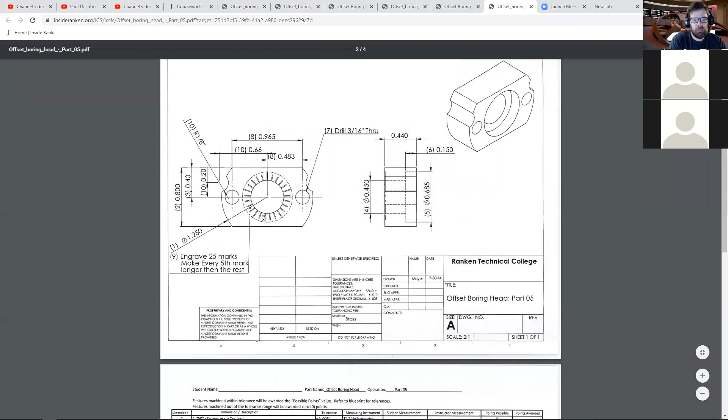So one of the things we can do is just kind of look at it. All right, so we have... I'm going to zoom in here. So if we look at that guy, basically what we have is a square with a radius on the ends. This radius is half an inch and a quarter, so it'd be what, 5/8.

So we have this radius that's 5/8 on each side, and we can also infer that the width of this flat is the same as the center spacing on these holes. Just from looking at that, we see our extension line basically goes up through there. It's not called out anywhere else, so we'll just assume that. Because that's our geometry, we can use that to our advantage.

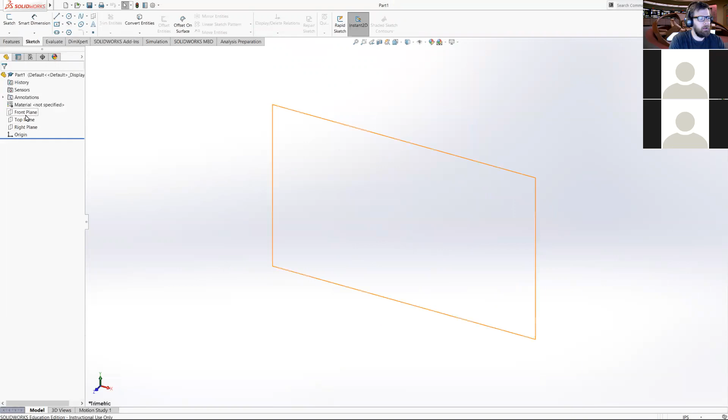Let's see, I'm just going to do top plane. And I'm just going to do a center rectangle here. So our center rectangle is going to anchor this to the center point, which is what we're clicking on, and then we can come out here.

Before doing any of the other geometry, I'm just going to go ahead and start dimensioning this section of it, which will make my life a little easier here in a minute. So that's all we really need to do, just give it our top dimension.

There is one thing there, since that's a two-decimal tolerance, I'm going to change that to 3 because that's how it's called out on our print. Same thing there. That was something you mentioned a couple weeks back, something about how we can set it up to automatically dimension things to 3 decimal places. How do we go about doing that?

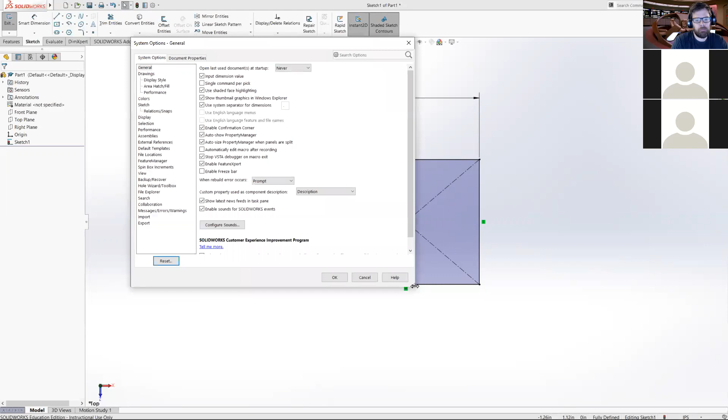Okay, cool. Basically in order to do that, we need to change the settings for this document. If we go up here to the very top in the options drop down, we have 2 different choices on options: document properties and system options. System options are going to be system-wide changes, so if we make a change here, it's going to change every single time we open up SolidWorks on this computer. That change will be enabled.

So the really common ones that I like to change are things like dangling dimensions, or non-imported dimensions. I'll get back into this later because we'll see the difference more when we get into drawings, but this non-imported one I usually change to black. These are system-wide settings, so it's not specific to our document. We can change all those.

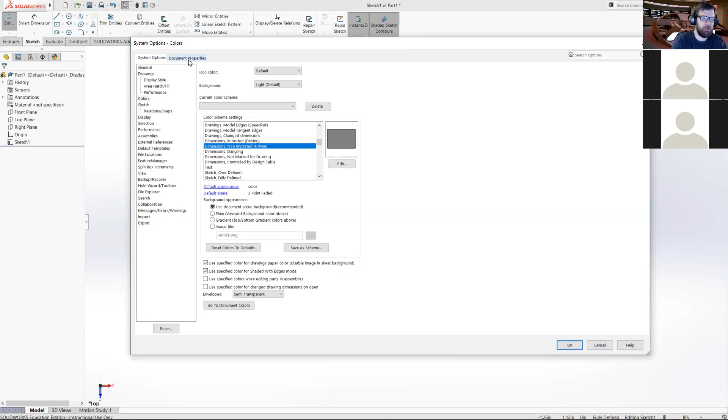But what we're talking about here is changing our unit precision, or our units. So we actually want to get into document properties to change units. If you go to units, we have our unit systems that we can select from. Most of them are going to be in metric, but we want inches, pounds, seconds. Then down here we have basic units, mass section, motion units - basically all of our different units that we're going to be getting information in.

So for length, all you need to do is go down here and change this to 3. Now my drafting standard has been changed. Since we're in here, I like to just change my angles to 0, or to none, because most of the time when you see an angle, it's going to be dimensioned to a full degree. And then we have dual dimension length, so usually it's 2 decimal places.

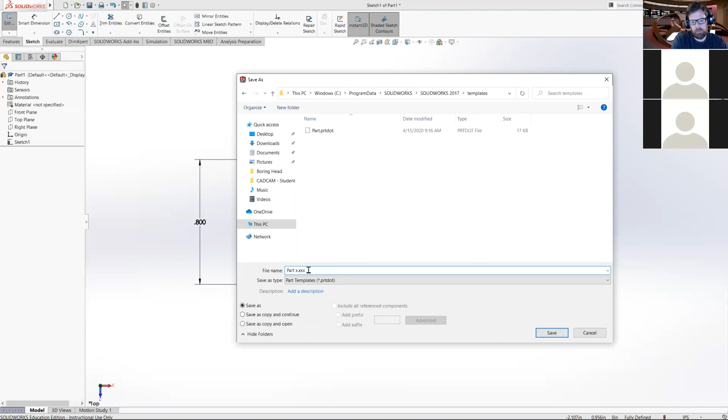Then we click OK, so this has saved that for this one document. But typically when we're doing this, since it's a change we want to make all the time, we can save this as a template right now. So if you save it as a part template, I can say that this is going to be, it's a part file, and it's going to be x.xxx. That's just saying I use the x as a placeholder for numbers, so that's telling me this is going to be a 3 decimal place template.

And now I click save. So right now, if I continue to change this, it's still going to be my template, right? Any changes I make to this are not actually changing my document, it's changing my template. So because of that, I'm actually going to go back and save this as a part file again.

All right, so if I go back, save it as a part, I'm going to find my boring head. There we go. I'm just going to call that offset boring head part 5.

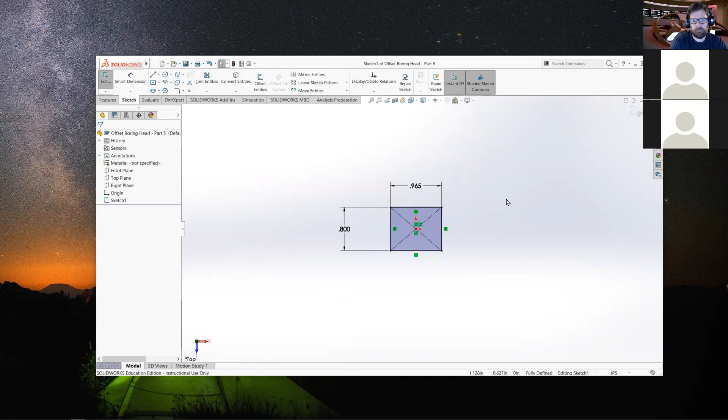So at that point, you just open up the template anytime you want to start a new drawing with those properties? Exactly, yeah. So if I wanted to create a new document with those exact same settings, instead of being in here, this is our basic format. If I have more templates, I can use this advanced tab down here.

At that point, now I see my part x.xxx. The problem with this is when I create a new file, it's going to save this block in there. So you want to change those properties before you start drawing, save it as a template, and then reopen it whenever you need it.

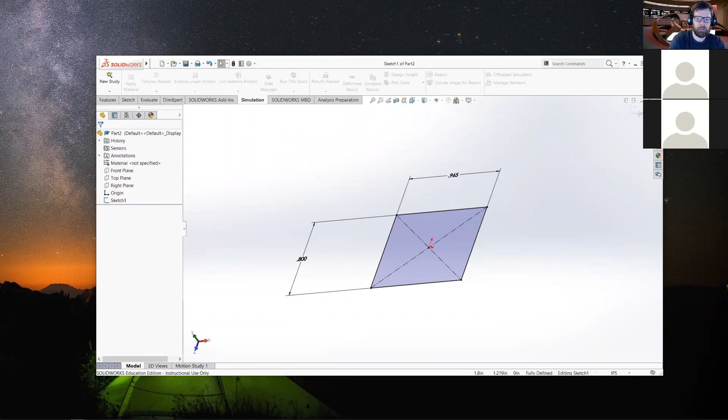Ideally, if you know you're going to be making a template, you'd start it before you start drawing anything in there. Or you can do your template and then just delete it. Like if I wanted to change the template, I could open it, delete the sketch, and then resave that template. I'm not going to, for that purpose. But basically, we'd want a blank file whenever we create a template.

Unless you know exactly what you're looking for. Because in certain circumstances, say you had a part size that, wherever you work, has a lot of different variations. You could set up a template for that part, and then you'd basically just be adjusting that one part to create a new file. So you could do something like that, but most of the time you're going to have a blank file for your templates.

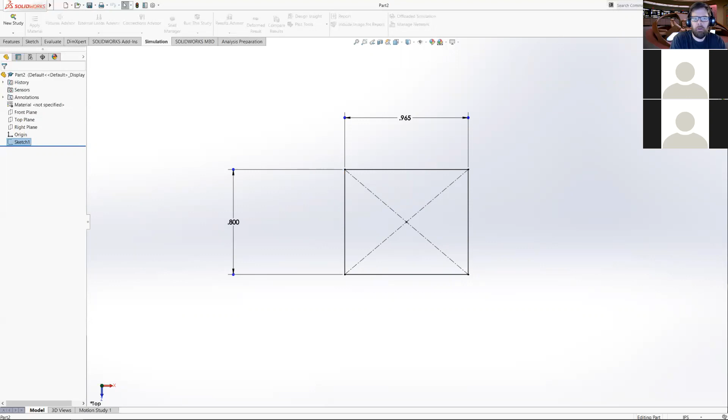All right, so right now I'm still in my part, but I'm out of my sketch. So I'm going to go back and edit sketch. And from here, I'm going to do 3-point arcs.

So a 3-point arc is basically you're selecting the endpoints of the arc first. So all I'm going to do is just click like so. I want to try to have this where it's not snapping to anything. If I come here and it snaps to this, what it's snapping to is a 90-degree arc.

If I look at that, my radius is kind of goofy. It's 566, and my arc angle is 90 degrees. So it's going to want to snap to certain spots. But if you can kind of avoid it so it doesn't snap, that's good, because sometimes it will actually create relations or create something when you let it snap to something.

Yeah, I was dealing with that all day yesterday. Yeah, sometimes it'll snap to a different piece of geometry, and it's almost like it locks it in, but it won't actually have a displayed relation there. It's kind of a weird gray area in SolidWorks.

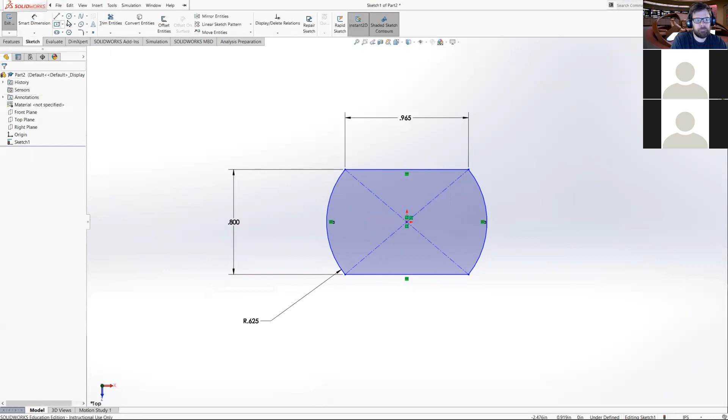All right, so now all I'm going to do is create 2 circles out here, and I'm going to put in a center line here. I could leave it and just dimension both of these, or do a mirror. Either one would work, but we'll do this a little differently.

All right, so that's our center line. It's coincident there, and I'm just going to fix it. Fixing it will freeze this in position, so when I make a relation between any geometry and the center line, instead of possibly moving my center line and leaving my geometry where it is, or moving both of them, that happens too. Now, because this is fixed, nothing can move it.

So with this, I'm just going to select my center line, select both of these circles, and do a symmetric relationship.

So I click symmetric, and that's it. So now when I dimension this guy, this is going to be 660 from the center. It's going to move both of my circles, and then that's going to be 200 from the top. And then I need to dimension this guy.

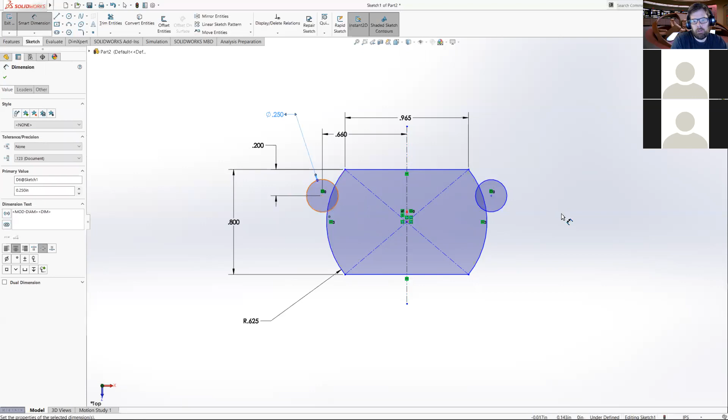So I'm going to dimension that, and that is going to be a 1/4 inch diameter. But if you noticed, it mirrored these geometry-wise, but it did not mirror the size of this, right? So on one side we're 250, on the other side is 247. So in order to make those the same, I'm just going to hold down the control button and click on my second part, and just make these equal.

All right, so I have one dimensioned, so that means that this is fully defined as well. That's really all we need there. So from here, now we can go through and trim. I'm just going to trim that, and I'm going to do the same thing over there. Love that power trim tool. So we're still good there.

So now I'm just going to go ahead and put my center hole in. And oh, I always forget to tell you guys this at the beginning. I usually kind of wait.

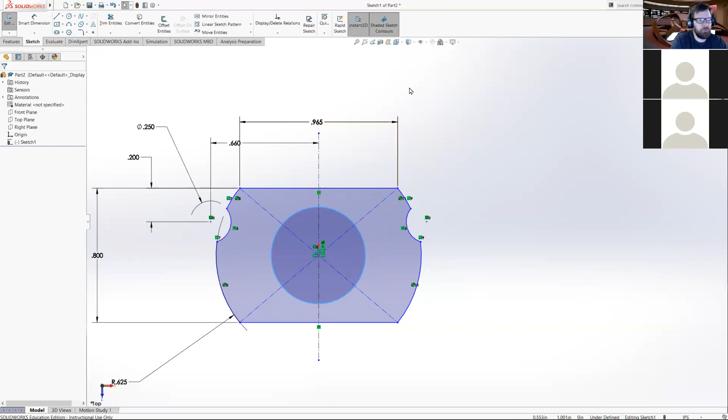One of my favorite shortcuts in SolidWorks is the S key. Wherever your pointer is, if you hit the S key - and it's easy to remember, SolidWorks starts with an S - it brings up the same menu as when you right click, basically what pops up is the draw or sketch menu. In this little menu, I have my smart dimensions, my line tools, my polygon tools, my chamfer, trim entities, offset. I basically have almost all of these, all the same tools that I have up here. So this can really save you some time, because instead of having to go up here every time and then back down, you can just hit your S key and it works pretty well.

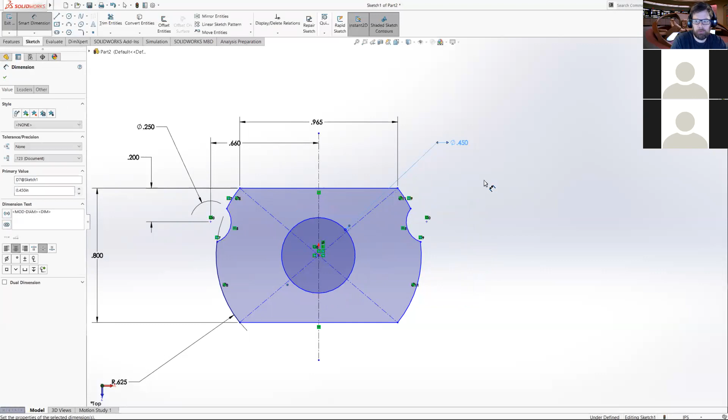So I'm just going to dimension that guy. It's going to be 450 all the way through. And then I'm going to extrude, so it's going to be 440. Just hit enter a couple times, and now we got it. All right, and so my sketch lines are still showing because I basically have my boss selected. Once I click on that, it'll disappear.

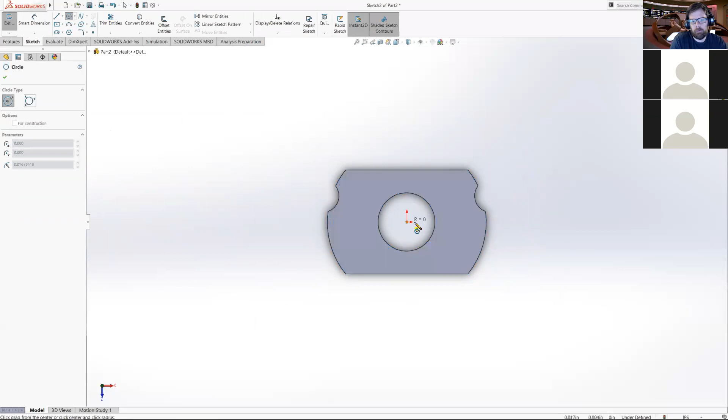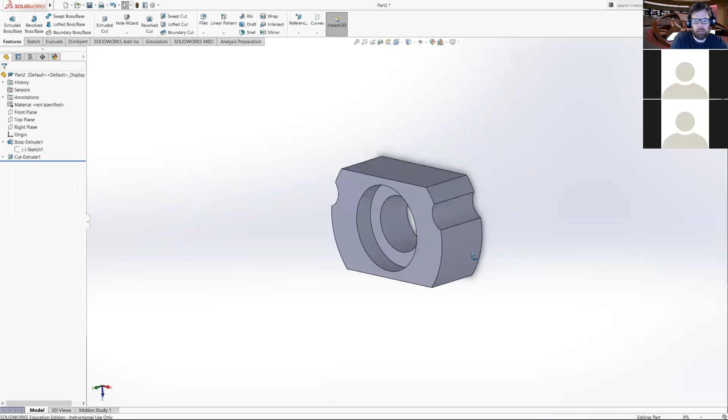Okay, so from here we are going to create a counter bore for our through hole. I'm just going to create a sketch on that surface, create my counter bore, create my circle, dimension said circle to 685. And I'm going to do an extruded cut with that guy down 150 thou. Hit enter, and now I got my counter bore.

And since I'm here, I'm already set up, I'm just going to go ahead and put those 3/16 holes through. I'll just select that surface because I know that's where the holes are going to go. I'm going to select my hole wizard, and I'm just going to do a standard through hole. So I did some custom sizing with this guy, so I'm just going to reset to your standard hole sizes. And then from here, I'm just going to go fractional drill sizes and 3/16. And this is going through all, don't need custom sizing or anything like that.

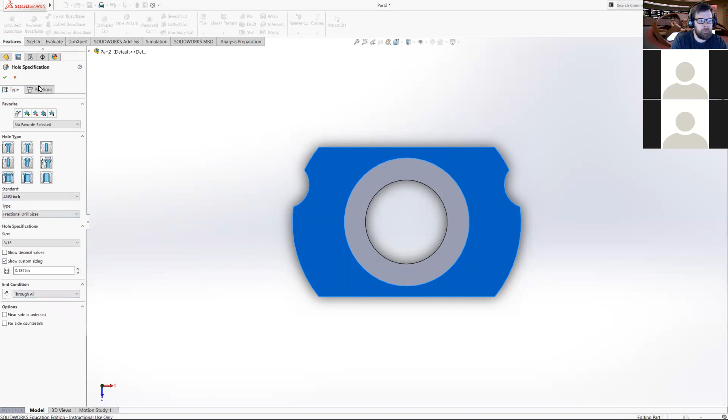All right, so same thing, I'm just going to create a center point. And I'm going to select this guy, select my origin, and select this left hole.

And I'm going to make these all horizontal. So the center point or the origin of this is never going to move, right? If I move my part, my origin is still going to stay in the same spot. But I have all of this centered around my origin. So when I put this horizontal with my origin, I know that this is going to be in the center of my part. And then I'm just going to make these symmetrical - control click, select all three, clicking symmetric and clicking OK. And so now I can dimension these.

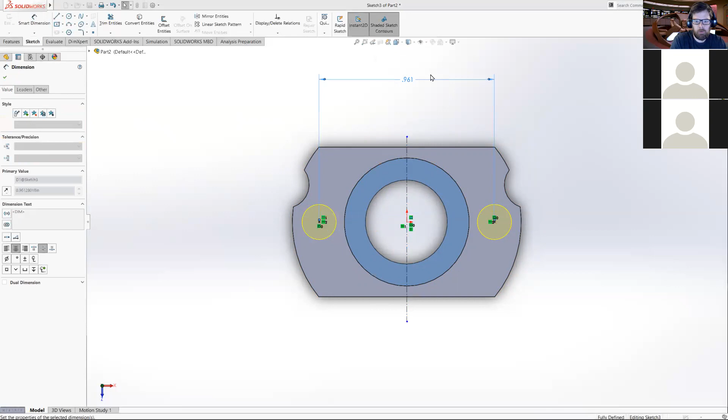So they're 0.961, and that's going to put them almost exactly where they were. Click OK, and now they're all the way through.

And just to make it pretty, I'll change the material to brass too. Ain't that shiny.

All right, now before I get too far, my favorite mistake to make is to not save my parts. So just rename that part number 5. And now we can do our marks.

Don't know why it really wants to be upside down, don't you? There we go. Okay.

So I kind of talked about this the other day. These are not really, well, I guess we could just say they are going out to the diameter. So, excuse me.

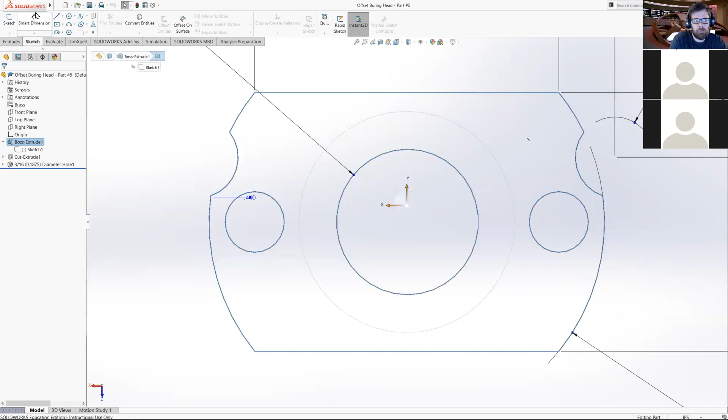So what we're going to do is we're just going to create a sketch on that surface, and we'll create a line that's going to go up like so. All right, and then that's all we need for that sketch.

And so now we'll create a plane for the end of this guy. So we want to create a plane so we can draw a geometry that's right on the end of this line.

An easy way to do that is figure out what plane is going to be parallel with that. So if that's our front plane, if I shifted my front plane up so it was coincident with that part, that would be exactly where I need it. So I can do that pretty easily since I already have my front plane selected.

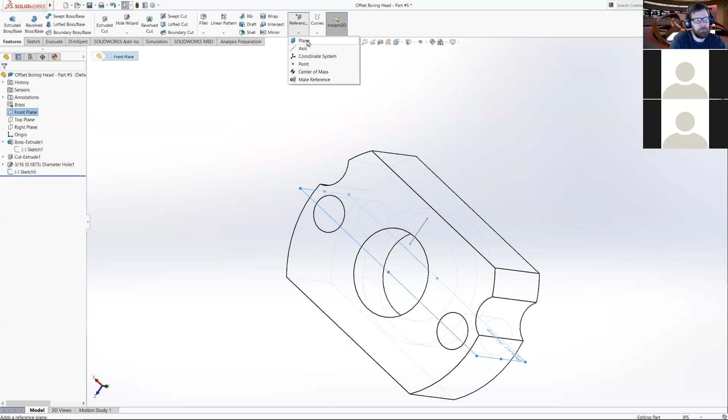When I go and create a new reference plane, it's going to automatically create it in relation to that. So by default, what it's going to do is an offset. It's going to keep it parallel with my original front plane, but just offset it in whatever direction I want.

I could offset this and figure out exactly where that is, or I can just select a second reference. So if I select a second reference, it's not going to do this offset distance. What it'll do is default to a parallel.

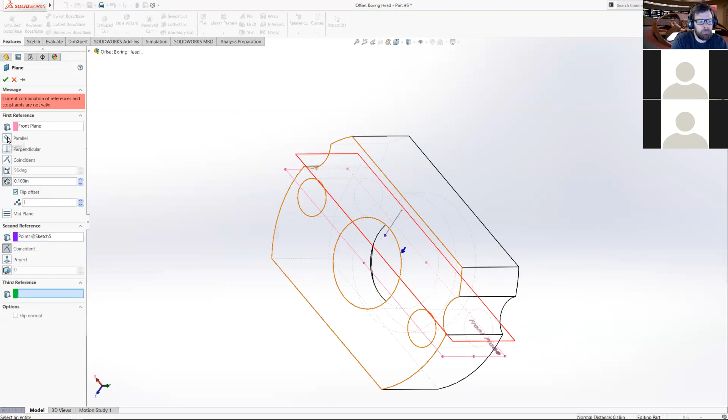Right, so if I select that, well, maybe it won't default. I may have to select it in a parallel. Since I messed around with the distance, I think that's what goofed it up. But usually, all right, so now I have a plane that's parallel with my front plane, but coincident with this point.

And so now I will create a drawing on that plane. Or create a sketch on that plane.

And so all I'm going to do is I'm going to create a triangle. I'm going to use my polygon tool and just set it to 3 sides. And I'm just going to go up like that.

And I can set how deep this is engraved. Let's say 15 thou. Oops, not like that.

So you notice that when I change that, maybe you notice it turned my triangle for some reason. Don't know why it's doing that.

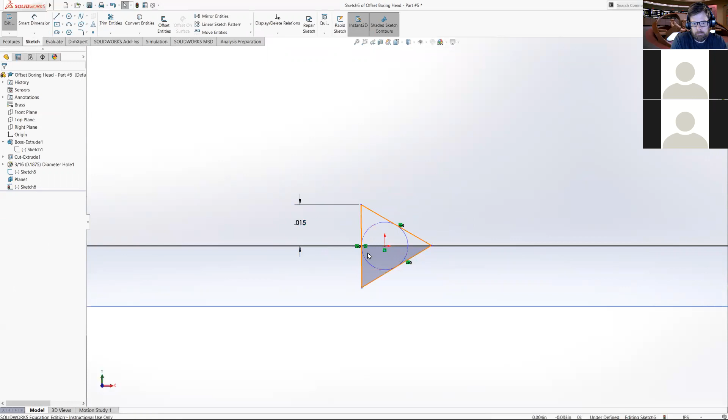So what I can do to force this into keeping the same position is, let's think about, I want this to be perfectly over this point here, right? Well, I can create that relation, which is going to force that geometry to stay in the position that I want it. So if I click make vertical, right, it's going to satisfy this dimension, 15 thou, but it's also has to satisfy that relationship.

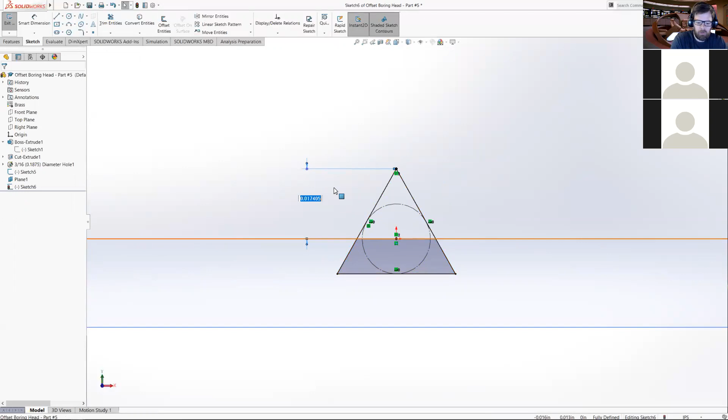So if I put in 15 thou now, instead of turning my triangle around, it's going to shift it down to the position that I want it at. Okay, so we can click close.

And now we can do a swept cut.

So sometimes, we'll see what happens. Sometimes with these, you can select both of your sketches that you want to use for your swept cut, or you can start off with one.

We'll start off with one, how about that? So I click swept cut, and the first thing it's going to ask me for is the profile. So the profile is the shape that we're cutting. I'll just select anywhere on that sketch, because it's going to use the entire sketch for that geometry, and then it's going to ask what path you want to take for that cut.

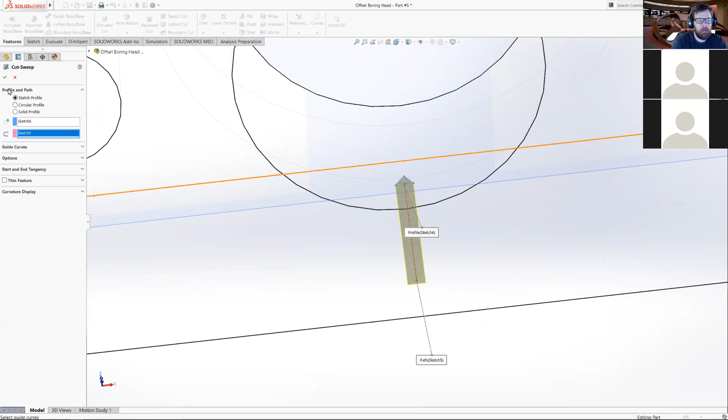So I'm just going to select that, and we will click OK, and that creates our little line like so. All right, so now we have that.

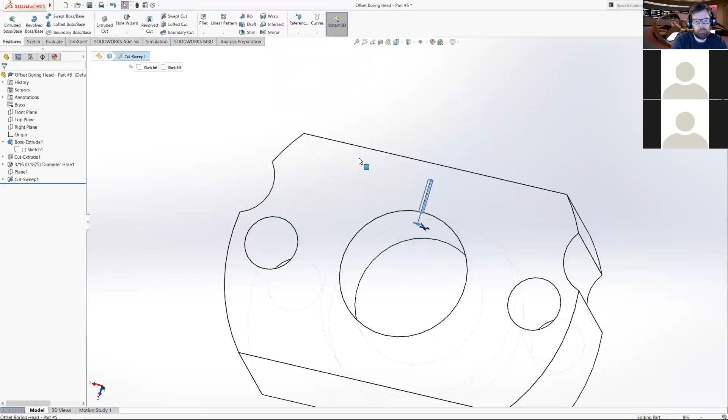Oops, I'm also going to hide the plane that we created. All right, so our cut sweep, this is where we can take this guy and revolve it around. It really wants to put my part upside down for some reason.

All right, so from here, all we're going to do is a circular sketch pattern. We talked about this last week - there are really two ways we can do a sketch pattern. We can do a pattern inside a sketch, or we can do a feature pattern. We want a feature pattern because this is already an extrusion. We could have set this up and swept just the lines around, but then we'd have to go back in and make these extrusions, which is more work. So the easier way is I'm going to select that cut, and then go into circular pattern.

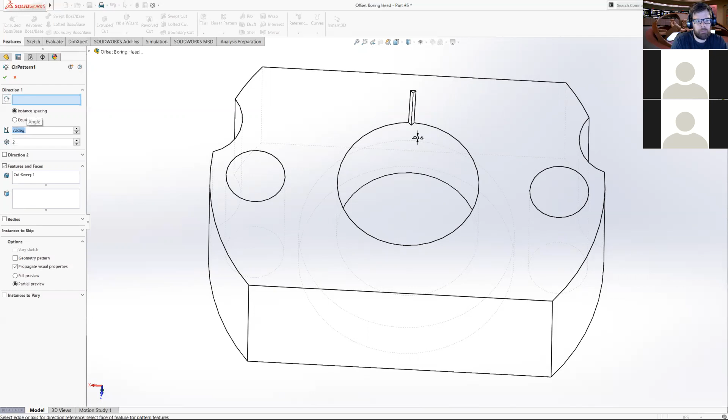So these long lines, there's going to be 5 of these. 1, 2, 3, 4, 5. So 360 divided by 5 is going to be our spacing here. And then we need to select where we're rotating around, so we can just select that circle. Now we see our first feature up here. We're going to select 5 - we're going to have 5 in total. And we'll click OK.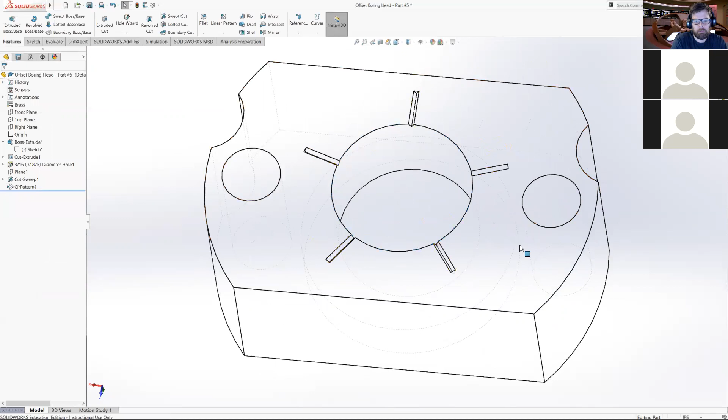All right, so now we have our big lines.

Well, I'm going to go back. You'd think I'd learn not to do that, but I keep doing it every time. All right, so we're going to...

Next, we're going to create our other geometry. In this case, we have one line that's going to be... what, I can't remember exactly. So it will take 360 divided by 25. I can't remember what the number was.

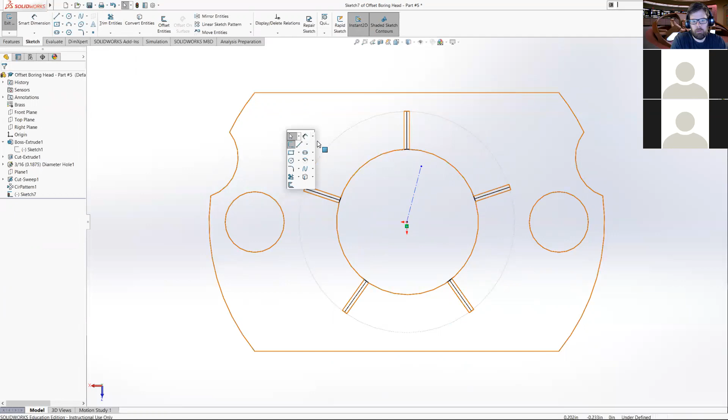But before we do that, we're going to create a sketch and just draw a line. We'll draw it a little bit longer on this end, but shorter on that end. We could do this a couple different ways - another way is if we created a center line and then just have a regular line coming up. That's another way we could do it. We could make these collinear, force those into a relationship, and now we should be able to rotate this around.

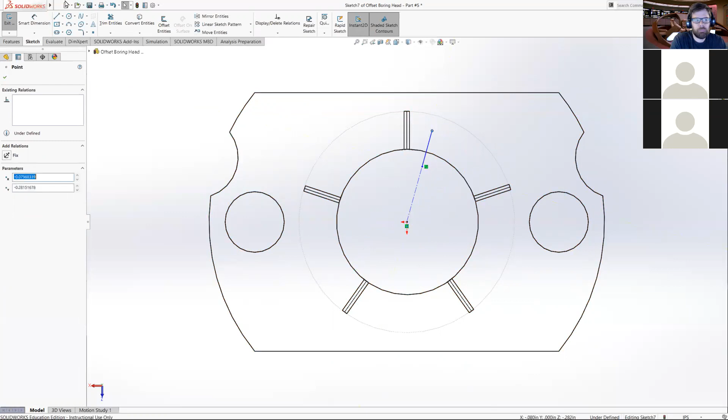All right, so we want this guy to be... 360 divided by 25 is going to be 14.4 degrees. 14.38 probably - no, 14.4, that's right.

All right, so from here, what we're going to do is create another plane. What I can't do is select my front plane and create a front plane that is parallel with this and then coincident with that, because that's going to create a plane that's not going to be perpendicular to this, which is really what I want. So I'm going to have to think about this a little bit. If I look at my top plane, if I create a plane that is perpendicular to a plane that is perpendicular to my top plane, that would start to put it in the right direction. So that's where I'm going to start.

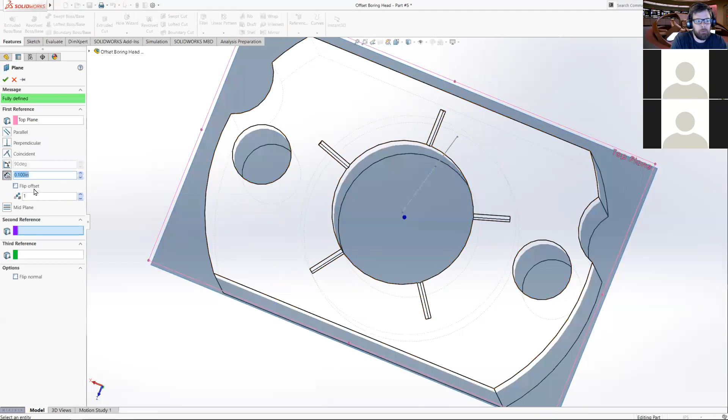So, I need to close that sketch out. I'll create a reference plane - it's going to be perpendicular to my top plane, and then I'm going to have it coincident with that, and then perpendicular to that line.

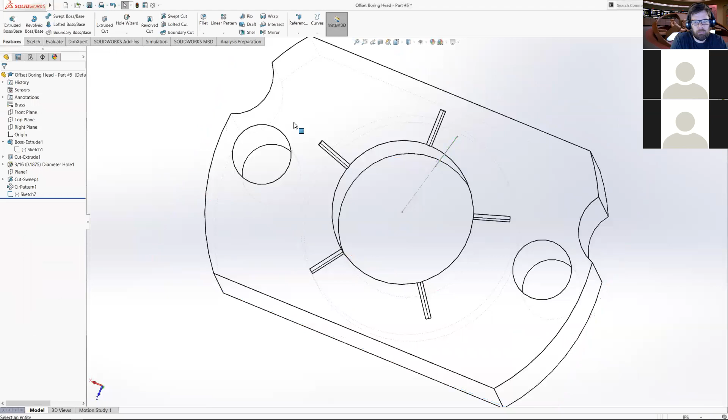Well, how is that not enough information? Okay, let's see. Nope, don't want an axis. There we go. All right, so what we can do instead - I guess I was trying to do too much with it. If we create a plane perpendicular to that line and then coincident with that point, that's going to give it enough information to figure it out. All right, so we'll click OK there.

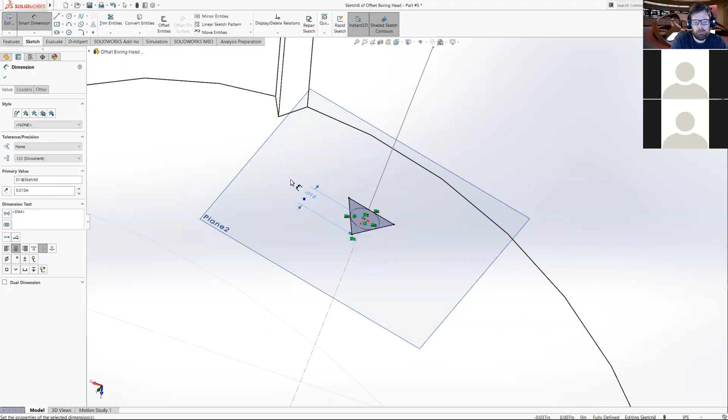And so now we have this plane here, right? Plane 2. So from here, I'm just going to again create a sketch, and again I will create a triangle. I'm going to put it on that, create a relation between my endpoint and my center point to be vertical, and then dimension that point to that point. All right, I'm going to have it 15 thou. And I can close that and hide my plane.

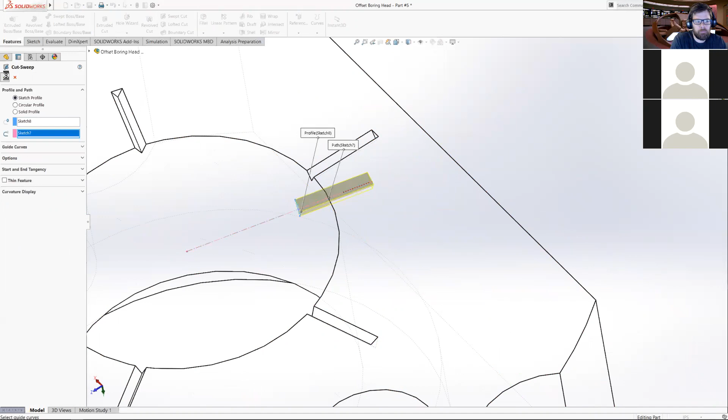All right, so now I can do another swept cut, and then... like so.

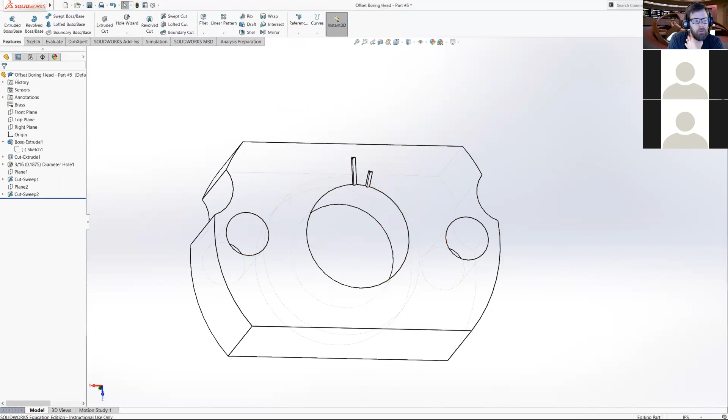I'm going to actually delete this pattern. We could do this how it is right now, but it's going to make it a little more difficult. If I try to pattern these how they are right now, I'd have to pattern 4 of these, skip 1, then 4, skip 1, and so on. Instead, if I delete this pattern here, I can make a pattern of just this one. So I'm going to create a circular pattern for that guy.

Select a circle. Oops, wrong circle. There we go. So I want 4 of these, and this is going to be 360 divided by 25 again. We'll click OK. All right, so now I have a full set of these.

I have 1 long one, 4 short ones, because every 5th line is going to be a long one. So now with this, I can highlight these 3 features, which the circular pattern is going to be 3 of these lines. This cut sweep is going to be that line, and this cut sweep is going to be that line. So now I can take these guys and do a circular pattern.

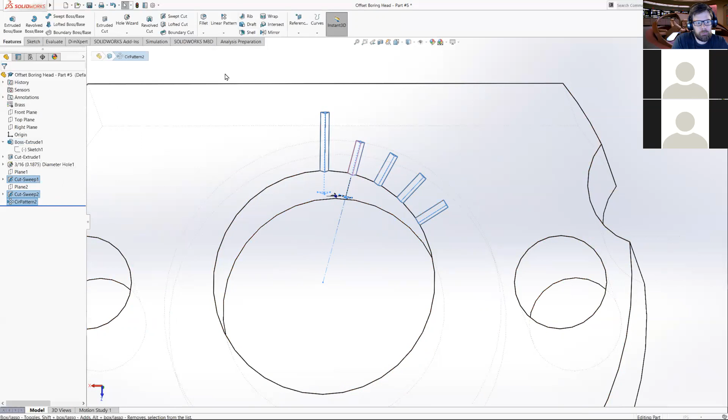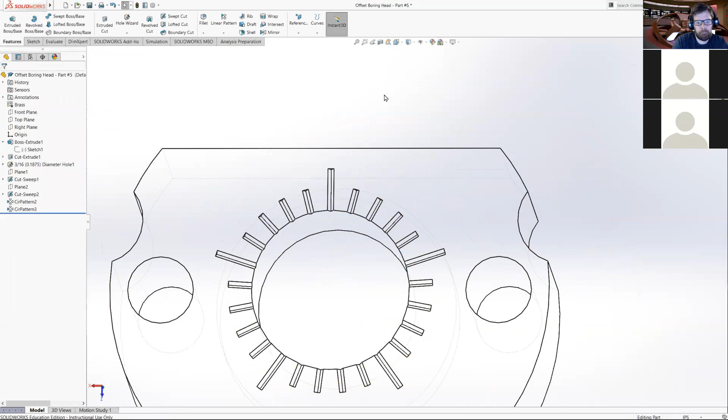And that is going to be 360 divided by 5, which is 72 degrees. We'll say there's going to be 5 of these. I can click OK. And so now we have our dividers on our part.

Now, like I said last week, this is not super duper useful for you. I mean, it makes your part look more or less like what it's going to look like. Yeah, I went ahead and just skipped it in SolidWorks and toolpathed it in Mastercam because it seemed like it was a little quicker anyway.

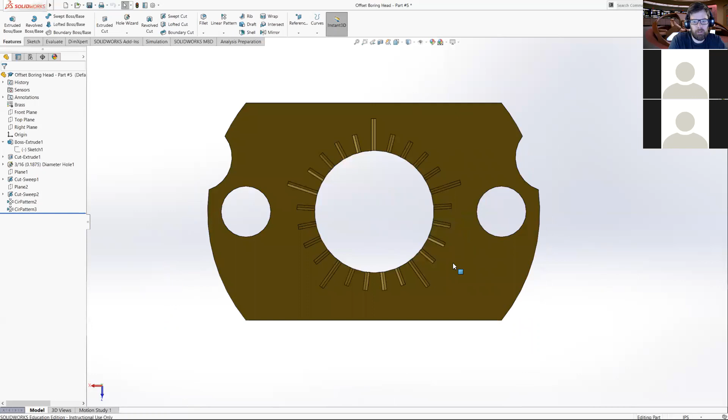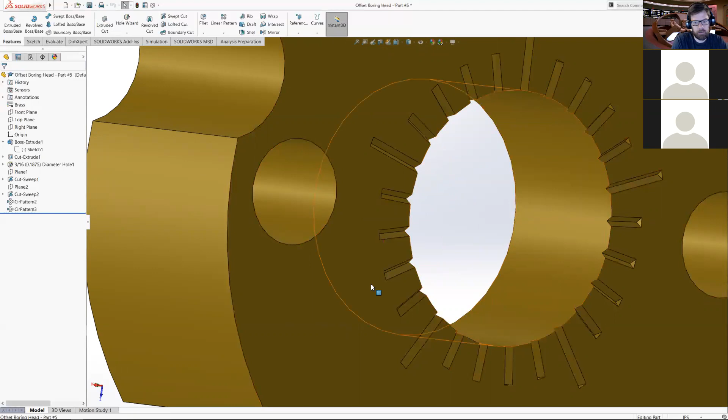Doing it this way is really just more extra work. You can do it if you have some reason to make a more accurate model, like if you're drawing something up for a customer and you wanted it to look exactly like it's going to look. Then I would do this, but that's probably about the only reason. Every other time I would do exactly what you said - take it into Mastercam and just draw some lines, because that's really all you need.

All right, so we got that as a part, right? We have our completed part file. This isn't super useful for us all on its own. I mean, we can obviously export this from SolidWorks into Mastercam, but that's probably not something we're gonna be dying to do. Well, obviously that's something we're gonna do, but even when we do, we're probably still gonna want a piece of paper or a drawing so we can figure out these dimensions.

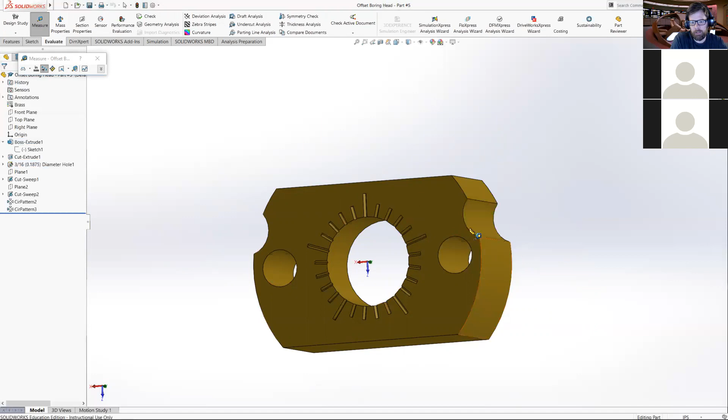If we go into our evaluate tab up here, we can use our measure function. We can measure the diameter of these holes, the size of these radii. We can figure out our center distance in X and Y, and our normal distance. We can figure all that stuff out. But as you can imagine, this is kind of not a great way to get our dimensions, right?

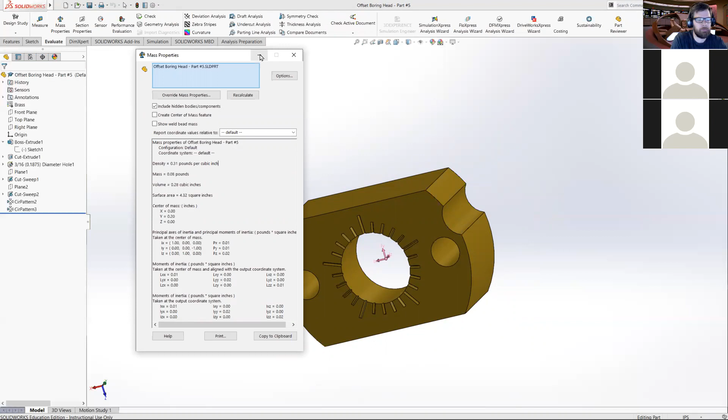But we probably want a print, right? We're probably going to want to print. So before you start your print, the best piece of advice I can give you is to save your file. Then from here, when we go up to our top, for the new button, instead of hitting new, if we hit that arrow right next to it, it gives us 2 additional options. We can make a drawing from a part assembly, or we can make an assembly from part assembly.

And you can make assembly from part assembly. It kind of sounds weird, but one of the things that really makes SolidWorks powerful is you can make assemblies inside of assemblies, inside of assemblies, inside of assemblies. So if you have a component that's made of parts that's going to go in a lot of different places, we can save that assembly and actually insert it into other assemblies.

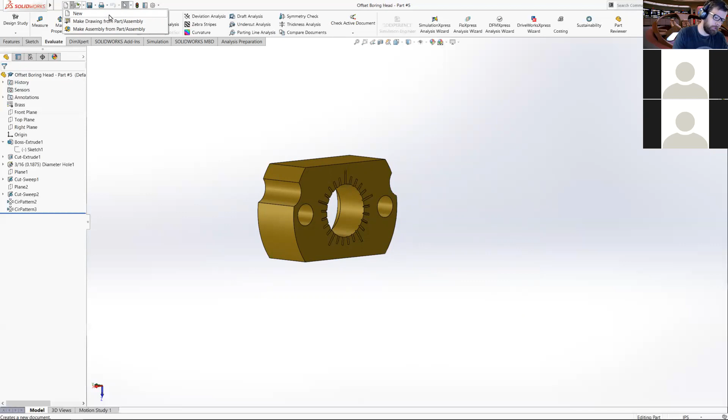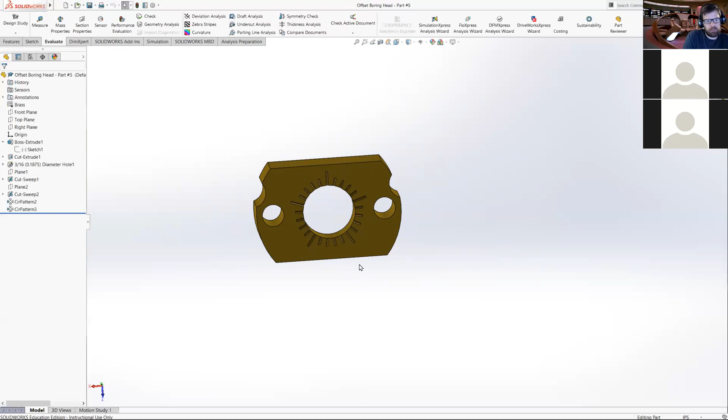If you think about building a house, those 2x4 studs in the walls are always the same size, usually in the same kind of formation. So if we wanted to make 4 walls, we don't necessarily have to draw all 4 of those walls. We could create a standard wall and use that 4 times, or use it 4 times and then adapt it. But we'll get into that later.

So what we're going to do here is actually create a drawing. So, make drawing from assembly, and it puts us back into our little file selector thing here. We're just going to create a regular drawing, and it's going to ask us what format we want.

There's a little bug in SolidWorks that I always think is interesting, because it'll always default to millimeters when you go to create a drawing. So like this landscape, this A landscape, this is an 8.5 by 11 sheet of paper, so it's going to scale things based on that. B is going to be a tabloid size... or, I'm sorry, that's not tabloid. Anyway, basically we just have different paper sizes we can use. But if you click on here and go to A and it's in millimeters, if you click on anything else and back to A, it'll be back in inches.

All right, so let's do landscape. We click on landscape and it's going to open up an almost completely blank drawing file. So at this point, we don't have anything right now.

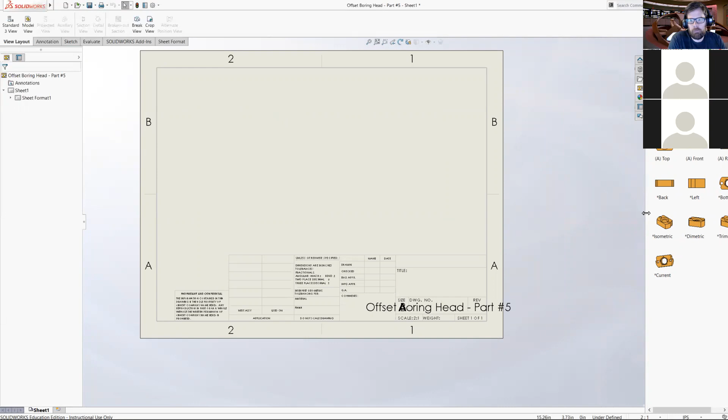But what it also defaults to is, on the right here, your view palette. So basically we have here all the different views of our part: top, front, right, left, back, bottom. We have a few ISOs too. This is actually our current view.

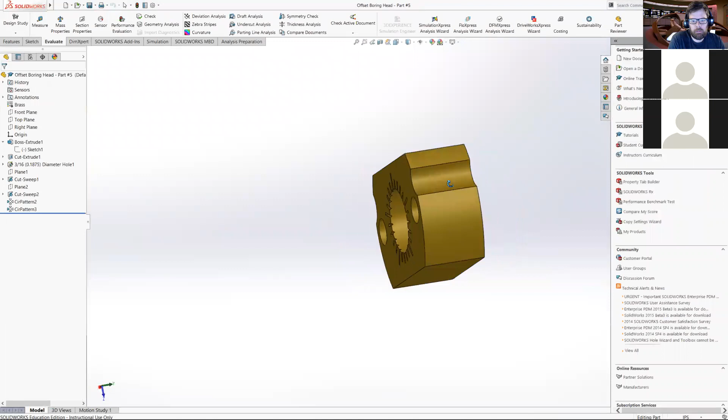So if for some reason this was the perfect view to see this part from—let's say it was—well, when I come over here to my view palette and click refresh, you can see my current view is exactly how my part is currently orientated in that part file. So that can be helpful if you have kind of a weird shaped part.

So how we use this is we just figure out which one we really want to use first. That bottom part kind of looks the most like our part file, so I'm just going to drag that out. Once I have an initial view, it's going to do a parallel projection of that view when I drag my mouse around.

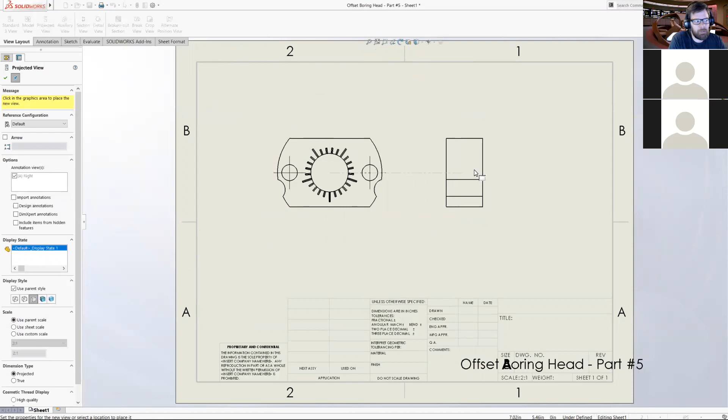So if this is my top view, that's going to be my front, back, right, left. And then if I go up at an angle, I can do an isometric view as well. Whichever one I want to keep, say I want that one, I'll pull it out and click, and that will automatically put it out there. It's also kind of nice to have an ISO view, so I like to put my ISO view in the corner. Once we're done picking out our views, we can hit escape and it'll close our view palette.

But if you ever need another one of those views, you can always come back up and drag these views out, which is handy.

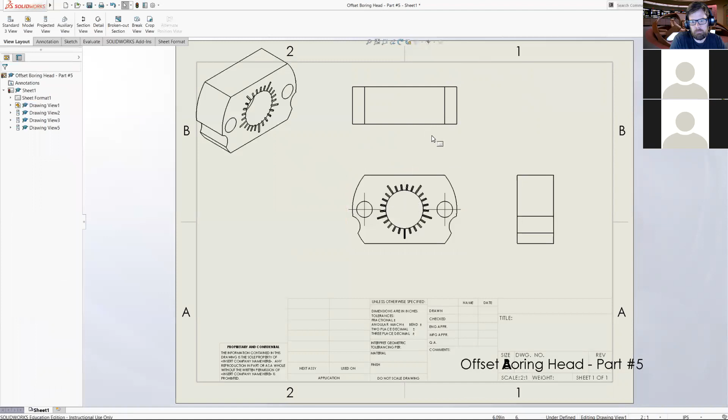The other thing we can do is, if I have a view in here and I have my front and my right view, but I really want a top view here also, I can right click on this and my little dialog box pops open. My first option is open part position, or projected view, or hide/show edges. If I do projected view, it's just going to reopen that selection I started out with, so if I wanted to add that front view, I still can. I don't want my front view, so I'm going to go there. That's pretty self-explanatory, pretty straightforward.

So once we have these views designated, this left column kind of changes meaning. When I click on this, this is all my information specific to this view. If I'm on my front view, I'm going to have more information here, because this is the view I started off with.

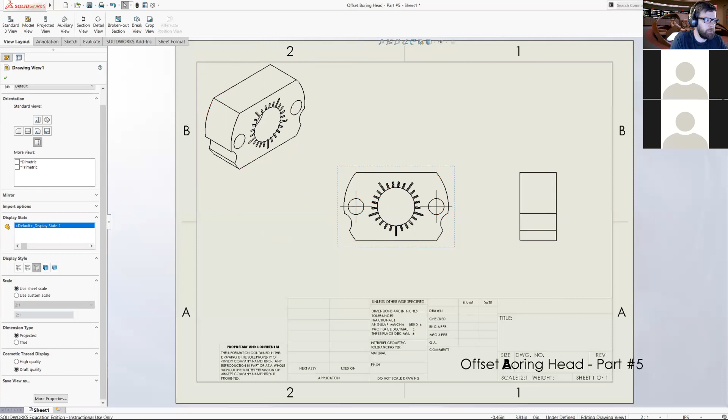I made projections based off of this view, so there's a little more information here. I can change all sorts of stuff, like how this is viewed. If I look on my blueprint, this has hidden lines visible, but right now no hidden lines are visible. If I go to display style, I can select different styles based on what I want. I'll select regular first.

Before I change that, I'm going to go around and change my settings on these parts. I've seen a few prints here and there that have, like on the ISO view, hidden lines visible. I've never really understood why people do that. But when I click on this ISO view in display style, there's a checkbox that says use parent style. The parent for this is my first view. If you think back, this is my first view I pulled on, and I pulled projections of this view out of it.

So this is the base view, this is what everything is based off of. So if I want to change this at all, or if I change this view, it's going to change everything in this ISO. Well, I don't want that. I want it to stay in a solid view.

But also, I like to make this smaller than my other parts. That's what this scale does. If I use parent scale, it's just going to fix it to whatever scale I make this. If I use sheet scale, it's just going to use this 2:1 — that's what scale on the sheet is for. But I like to make it a little smaller so it doesn't take up as much room.

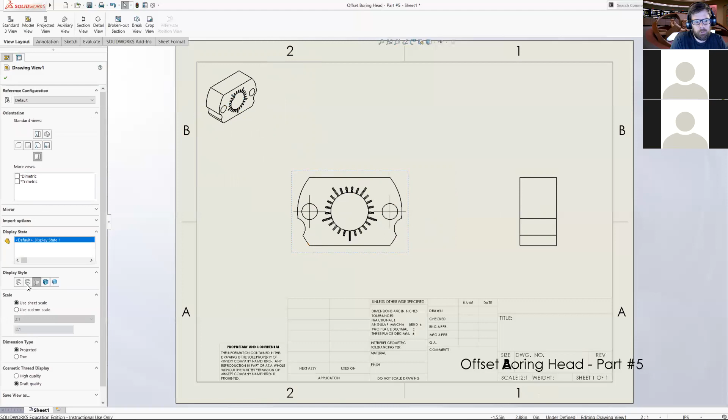So if I click that now, when I change this to hidden lines visible, I won't see them up here. If I change the size on this, it's not going to change this up here. From here, we can go back and select hidden lines — keeps that guy looking original — but also I'm going to increase my scale a little bit.

Maybe 2 to 3. No, wrong way, wrong way, Paul. All right, so 2:1 is that, 4:1 is going to be a little big. Maybe 3:1 will be just right. So 3:1 is not in my drop down.

So what I can actually do is use a user defined value, and at this point I can put in whatever I want. So 3:1 looks pretty good. You know, I could say 5:2 — yeah, a little bit smaller. Actually, I think that might be in my list. Nope.

Pretty good, right? So now we have our basic part. We want to save this. The nice thing is it will default to the original file name, so we'll just save that.

And the reason I wanted to save that is because this is one of those things that will frequently crash your part or your file. Sometimes both of these are kind of crash prone, sometimes just one of them are. So the first one we're going to do is model items.

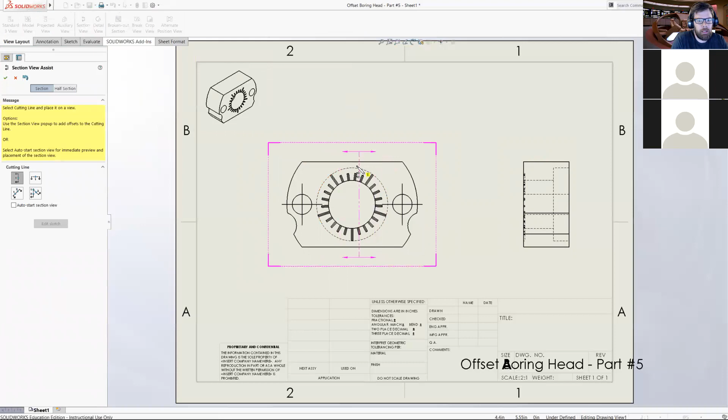So we have our view layout, and this lets us do all sorts of different stuff here. This is going to be our standard three view, projected, auxiliary. We can also do detail or section views. If I wanted a section view of this guy, I could click here, click OK, and now it's going to create a section view, give it the scale and all that. Don't want that. Detail view is going to do the same or similar deal.

So all the views you know and love from blueprint reading. Breakout, broken views, crop views, all that — should be pretty self-explanatory. In the annotation function, that's where we're going to put in our dimensions. We can do this a couple different ways. The first way is we could just go in here and manually dimension everything.

We could do that, but the problem is we already did this. We already dimensioned everything and put all our dimensions in there to make sure they were right. So instead of going in and redimensioning things, I'm just going to do model items.

For model items, I want my entire model, and I want to import items into all views. If I don't have this selected, it's just going to do whatever view I have selected. And if I don't have any selected, it'll ask if you want to do the entire model, so just go ahead and switch it to that.

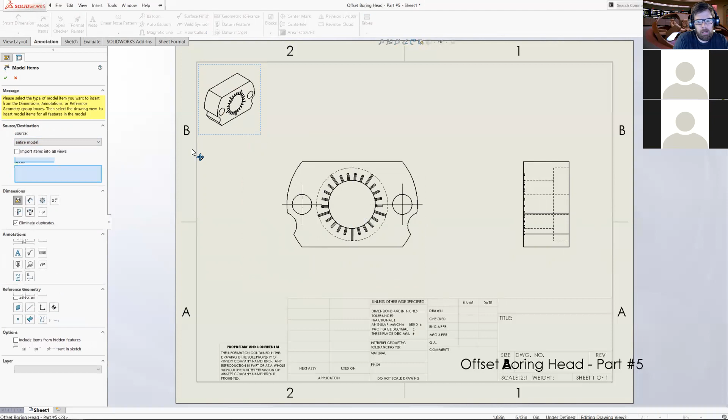It's not going to put dimensions on our ISO up top, but it will put any dimension we have or that we've defined in our part. From here, we want to select not marked for drawing, since we didn't mark any of these for drawing.

We want to do hole wizard locations and hole callouts. You can do instance revolution counts, tolerance dimensions, all that stuff. And we want to import items in all views, so let's do tolerance dimensions as well.

Then we can stick this stuff in here if you have datum references, GD&T references, weld symbols, or finished surface callouts. And then reference geometry, right? We could include our center lines or axes or our reference planes, that sort of thing, but probably you're not going to want to use that.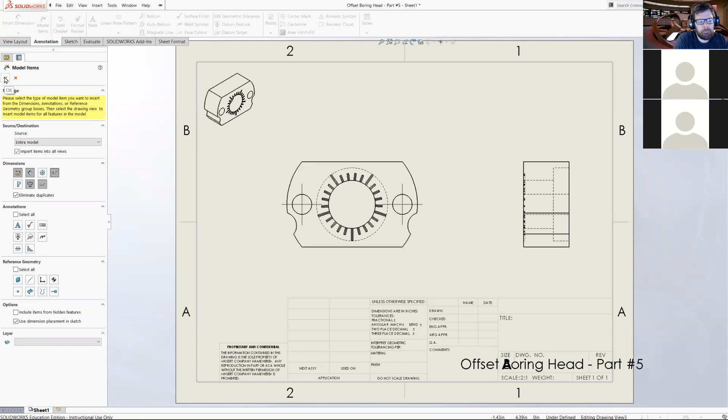So when you click OK, it should drop down almost all these dimensions into your part. Now, the trick with this is sometimes it will have, like in this case, duplicate dimensions, and sometimes it'll have dimensions that aren't really what you're looking for.

So usually you're going to have to go through and kind of move stuff around. This is a really good example right here. I have this whole callout. Well, first of all, depending on how I wanted to do this, right?

If I wanted to have this diameter on this hole, right now this diameter is to 2 decimal places, so 3 decimal places would be a lot more useful. But when I change it to 3 decimal places, that also changes the tolerance. So in this case, what I could do is change this to, well, not none.

What I could do is override this dimension. If I go over here to override units, in my value, or up here in my feature manager, I have value, leaders, and other. So override units is going to allow me to leave it in inches, but change it into fractions.

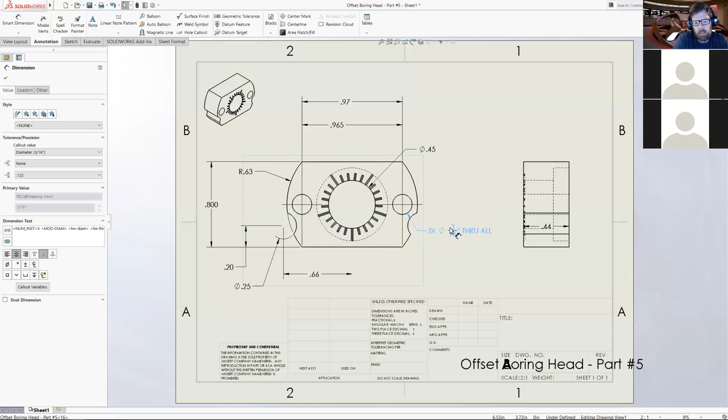And then I have this little dot right here, and this is the dot that determines what feature this is pointing at. If I take this and grab that circle, I can't drag this to anything but another circle. It won't even let me think about dropping it anywhere but another circle. What it's really not going to let me do is select anything other than a feature similar to this, or a feature that this is also called out with. So we have a 2x, so I can actually drag that callout to that hole over here, which puts it outside of my part, much further outside, which is going to make this quite a bit clearer for people.

That's kind of one of the things you need to think about when you're making blueprints. It's not just you that's going to be reading this, it might not be just you. So you want to come into it with that thought process: how can I make this the most readable for the most people? We've all seen bad blueprints out there, and a bad blueprint just makes your job way, way harder.

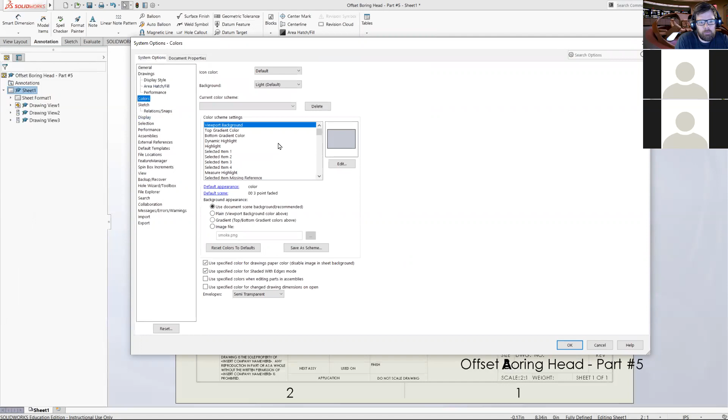One of the things you probably noticed is when I pulled this over, now this is kind of a gray color instead of black. That's because Solidworks for some reason thinks that me calling out this hole is a better dimension, or a more solid dimension, than me dragging this over to this hole, which is the same hole. So this is that setting in system options for colors - dimensions non-imported driven. A driving dimension is a dimension that is driving the shape of that part. A driven dimension is a dimension that is driven from the shape of that part, or from what that part is. Hopefully that makes sense.

What I'm going to do here is edit this color and make this black. And click OK. So you might have seen that there - it changes this dimension from gray to black now. The reason why I do that is because if you leave this gray, it will print gray on your blueprint. When you print this in black and white, it'll print this dimension as lighter, which can make it more difficult to read.

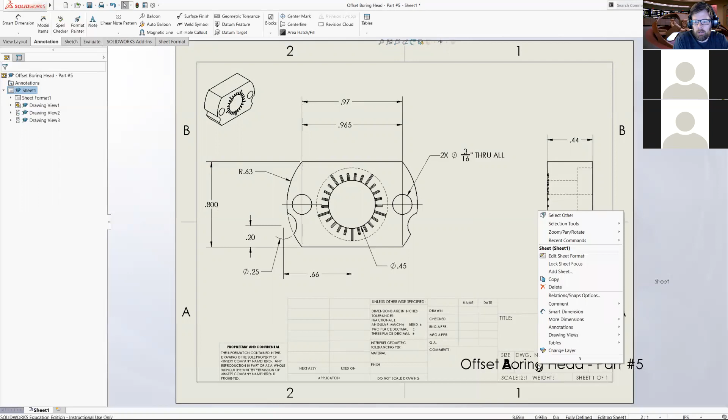Now we're going to change two more things about this print. The first thing we're going to change is this down here. Right now, for some reason, it defaults the file name into the drawing number for this part, which I've always thought was a little weird. So in order to change this, we're just going to right click down here, and edit our sheet format. Edit sheet format is going to allow us to change everything about this sheet other than the actual part that's on here.

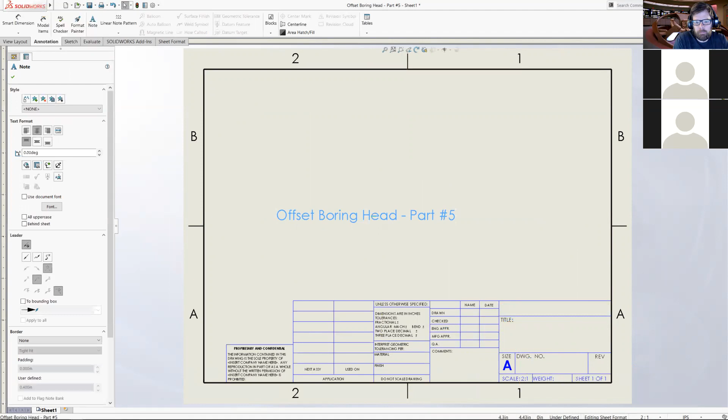So when we edit sheet format, basically what that allows us to do is edit our title block. From here, we can drag and drop these around. These are technically text boxes, so what I'm going to do is change the shape of said text box, and then drag it back down so it's in our title block. It's really just not liking you there. See, that's the thing - it looks terrible while you're doing it, but then you let it go, and it's like, oh, that's exactly what I thought it was going to do.

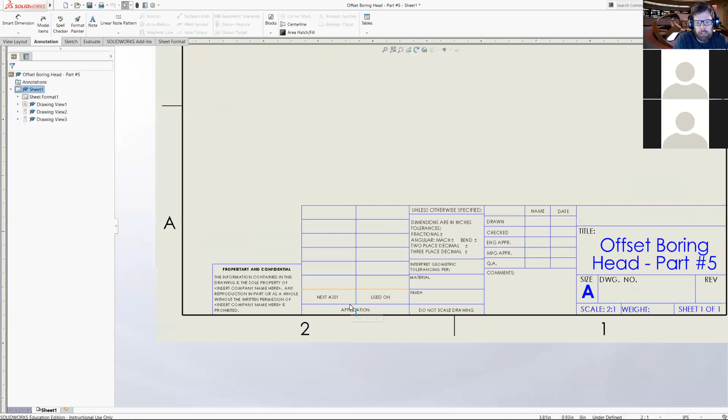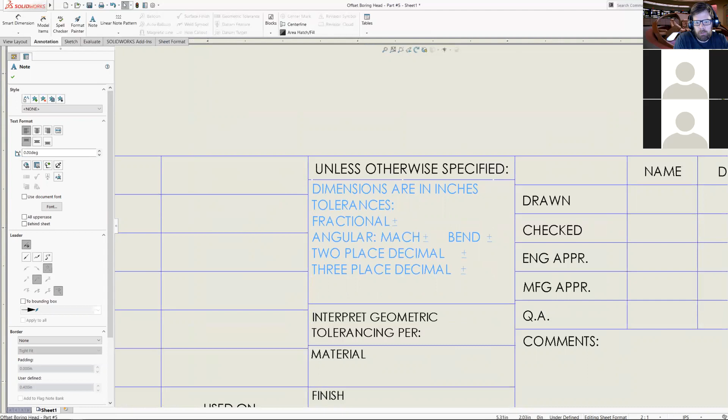Some of this stuff works better than others. This is really the biggest reason to make a template in SolidWorks though, is to create your blueprint templates, because things you want in there are like your tolerances. So our fractional tolerance is going to be, oops...

What is going on here? Why won't it let me edit this? Oh, it is letting me edit it. It just won't show me where my... oops.

Angular - so these are your angular tolerances for machining. That's the mach, and bending. We don't really do a whole lot of bending in here, hopefully not on purpose. And then our... might be a half degree. I can't remember what our normal is.

Let's see if I can remember. Yes, if you hold down Alt and hit 176, that is the shortcut for your degrees.

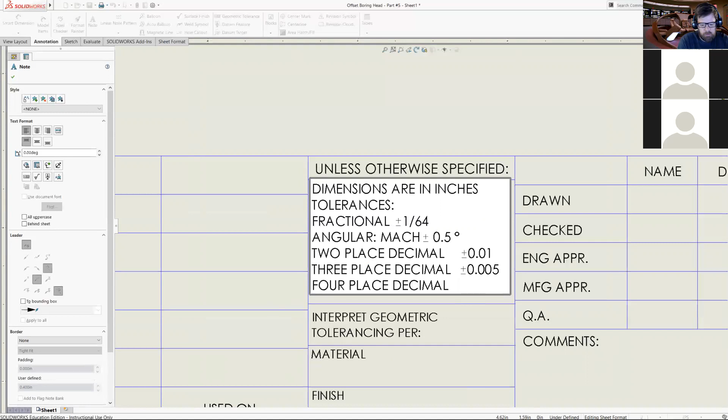And 2 decimal place tolerance, let's just say 10. 3 decimal tolerance, say 5. And 4 place decimal. Oops, nope, that's not it. Okay, Alt 0177. Yes, all right.

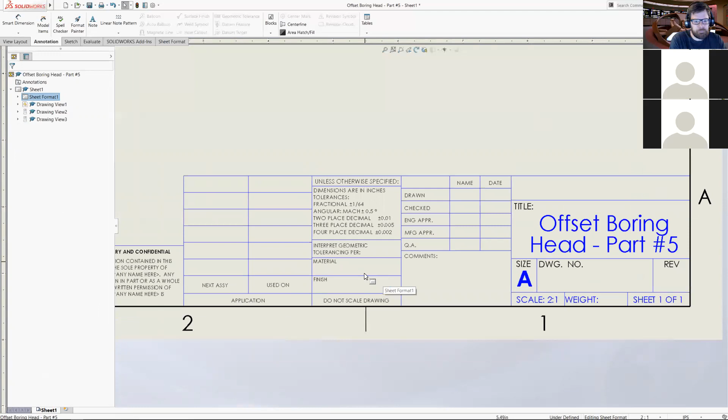All right, so then that would be basically your title block. And you could obviously come in and have other information in here. Don't know why it's not updating material. Should. But what I was saying earlier, right.

And now I'm going to show you the - lots of times is Crash City for these guys - and that is Format Painter. So Format Painter should be one of those things that is really, really super helpful for us. There's a lot we can do with it, but for some reason it just doesn't work all the time.

So what Format Painter is supposed to let us do is take one dimension that we get set up exactly how we want, right? So like, let's say all these dimensions were in 2 decimal places, this is in 3 decimal places, but I want to change everything to 3 decimal places. What Format Painter lets me do is select a source and then copy that to my other dimensions.

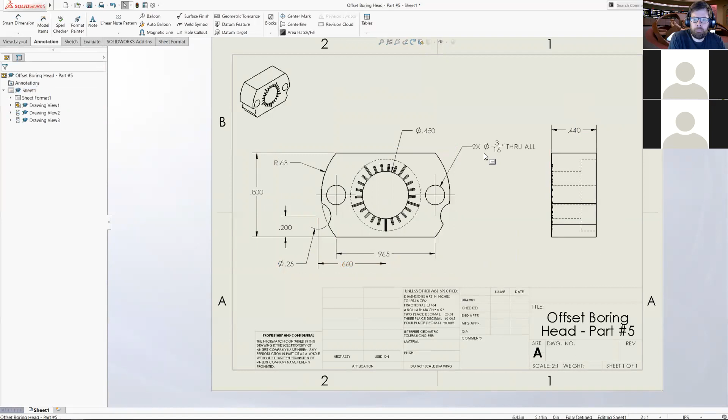So if I had this dimension here and I wanted to change everything to 2 decimal places, I can do the same thing. It'll work with any dimensions. It used to be a lot more useful because the defaults for these dimensions in SolidWorks used to be really stupid - used to put everything at an angle, all sorts of fun.

Any questions? I'm good. Okay, so that's really all I wanted to cover.

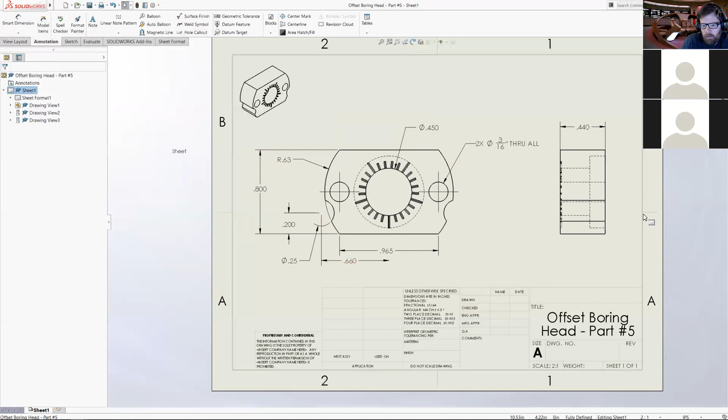From here, saving it is just like saving it in another file. If we needed to print this out, sometimes your printing can be a little funky - sometimes it'll try to scale this over multiple sheets of paper. Nothing really any different than any other printing. Just be aware of what your settings are and all that stuff.

But that's pretty much it. That is making blueprints in a nutshell. Obviously, hopefully, all the dimensions we're looking for are on here. Sometimes it will not call these dimensions for whatever reason as to how they were drawn or dimensioned. Sometimes it just won't pull a dimension up for it, but I think it's pretty good.

So, is this something that's going to be part of our homework? I guess, yes. So what I was going to have you guys do is draw parts 5 and 6, or make models for parts 5 and 6, and then create blueprints for all the offset boring head parts.

Cool beans. But once you get your template set up, once you get your first print or two made, it's really more of a repetitive process than anything. But we'll talk a little bit more about templates and that sort of stuff tomorrow, how to get this set up so it'll kind of streamline your process. But I think that's kind of a good stopping point for the day.